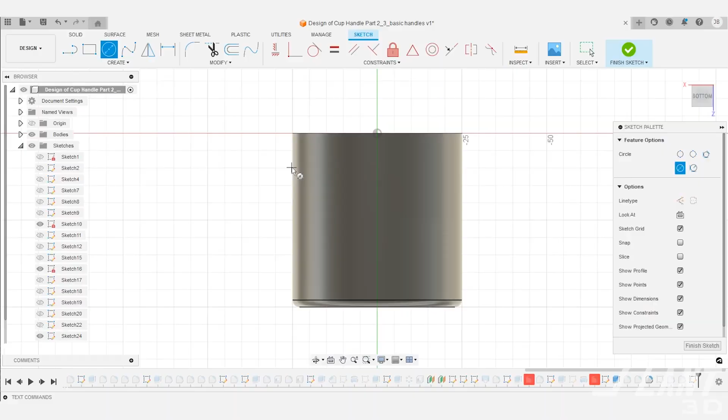If you don't need a feature, do not use it. A lot of products just need an area to kind of catch a finger so that you can pick up something heavy and get a little bit of grip on it. These nubs are a very easy way of doing that. And there's actually the option to invert them so that they are divots and dimples inside the side of the part so that you can have a better grip on it as you are picking it up or grabbing it so that the fingers can catch underneath.

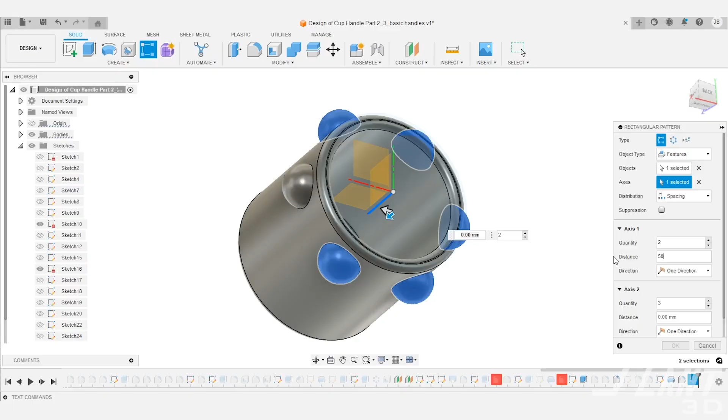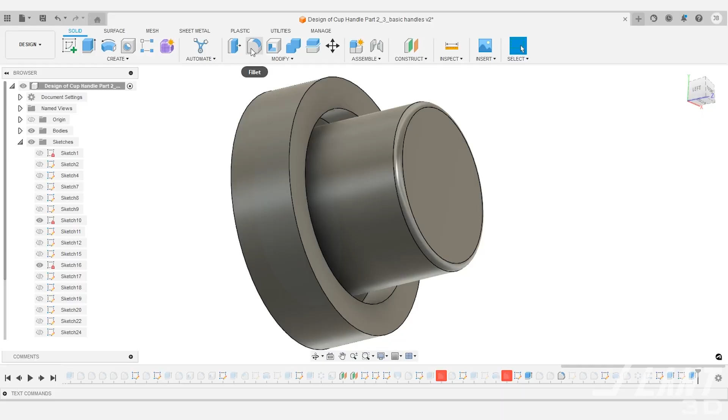This is often done by just a general hemisphere and is a very simple type of handle to use, though it's technically really no handle at all. But if no handle at all is a place to start, if you can get away with it, then let's go to the opposite end and have a handle everywhere. You can actually design handles that wrap around the entire outer circumference of a part. These type of handles allow people to get access to whatever your piece may be from any direction, and they can be very reliable and very strong. They're also very easy to design, especially if you have a circular option like this.

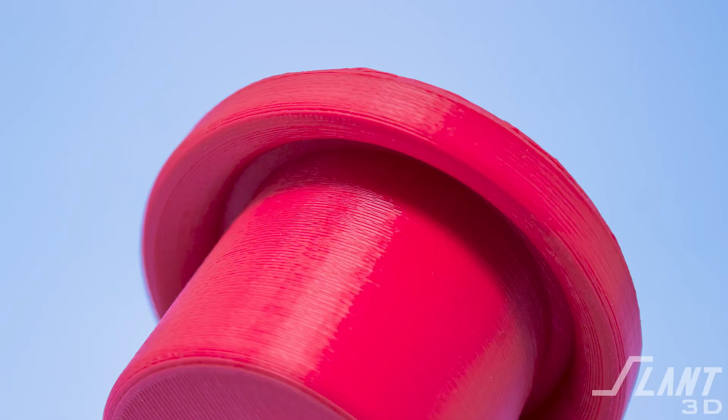But these handles do suffer from the fact that you don't really get a lot of grab on them, but they can work very well for trays or individual containers where you just need to get a lip on them pretty easily and you would like to have a full 360 bit of access to that part. But then let's go ahead and go into regular handles.

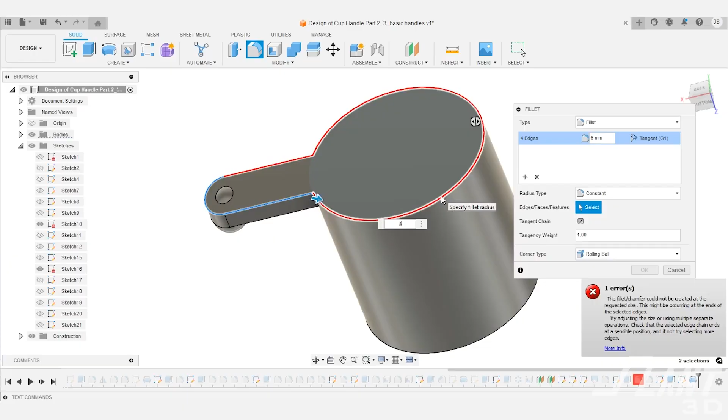The most fundamental type of handle that you can have is actually a rod or a stick coming out the side. But within 3D printing, you have no restriction on the overall design of the handle. It can be thick, it can be wide. There are no restrictions based on the shrinkage of the material. So you can actually take what would normally be a standard dowel or rod sticking out the side and instead expand it and make it wider or thinner, and then even add individual buttons on the bottom so that now you can get a good grip on whatever your object may be, and you can change the handle to the exact width, size, and depth that you actually need so that it is useful to you.

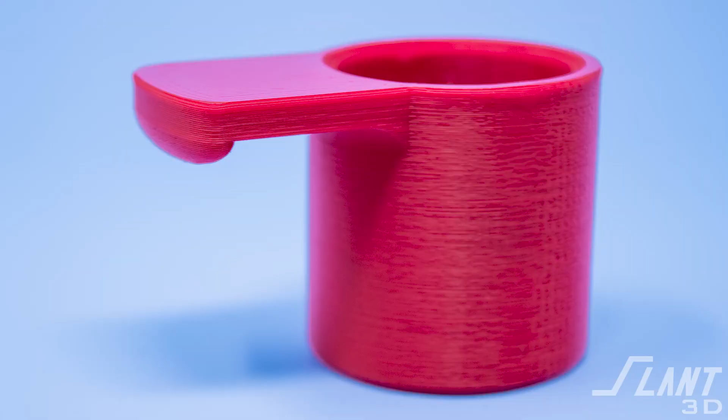So that is a very simple expansion of a very old style of handle, but you have so much more flexibility because again, you can make this exceptionally thick to increase its strength. You can make it wider in this direction so that it kind of wraps around or stretches around the whole object, or it could stretch along the entire edge of a rectangle so that you can have a handle that has good grip and is very simple and easy to use.

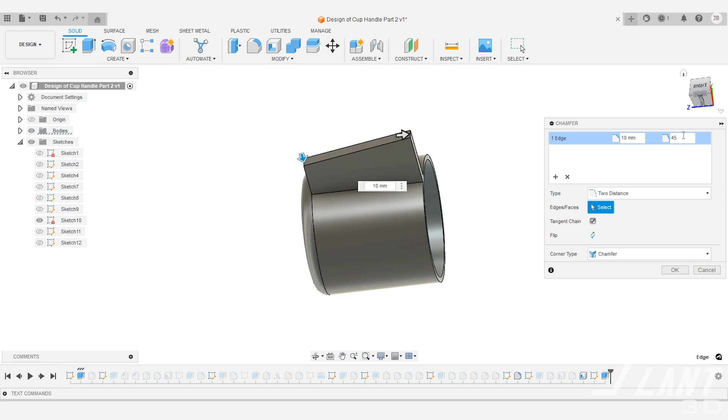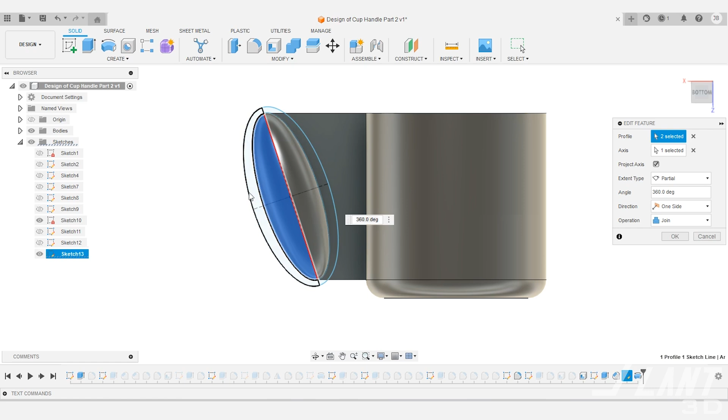But then there are the traditional fin handles, and fin handles are a really good option to use, especially in 3D printing, because each individual layer is continuous. When designing handles for mass production, you want to eliminate as many steps between layers as you can. You don't want to have to move right here, retract, and then move over here. So fin handles like this are a very good option, but you can actually add bulbs to the end of those fins to give a better grip so that you can get ready access to whatever it was. And again, you can make that grip larger and smaller in order to match the container that you're actually using.

This is a very small thing. This could be like a measuring cup of some sort, or you could scale it up to the size of the mug or to the size of a bucket where you would have a couple of these on either side. And they can provide really good grip and really good traction onto the handle while still being very easily mass producible.

These types of handles are not traditionally used with other types of manufacturing because they use a lot of material. If this was molded, then that bulb would shrink and cause deviation and warpage that is not really desirable and creates an inferior product. But you don't have that restriction when using mass production printing. Now, that bulb handle and those fin handles are a really good option because it's a continuous single outline for each layer of the part.

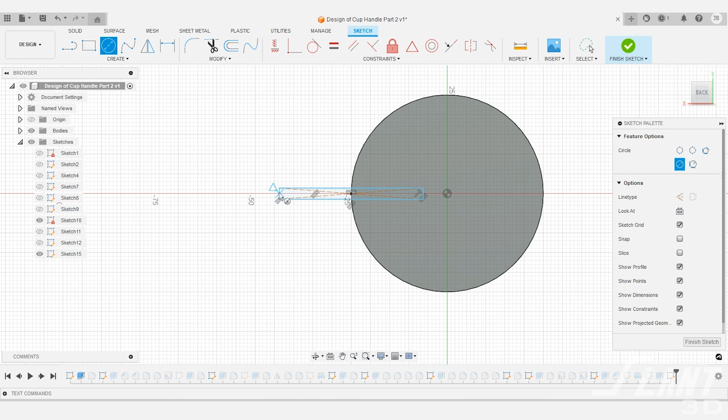And you can take that option and expand it to something like this. We call these eye handles. They're a very simple way to get access to both sides of it. They're generally printed vertically like this. This is the optimum way to do it, where the build plate is right here and growing upwards, but they can be turned sideways in order to create kind of a handle like this, but it's not the greatest. It's best if they're done like this.

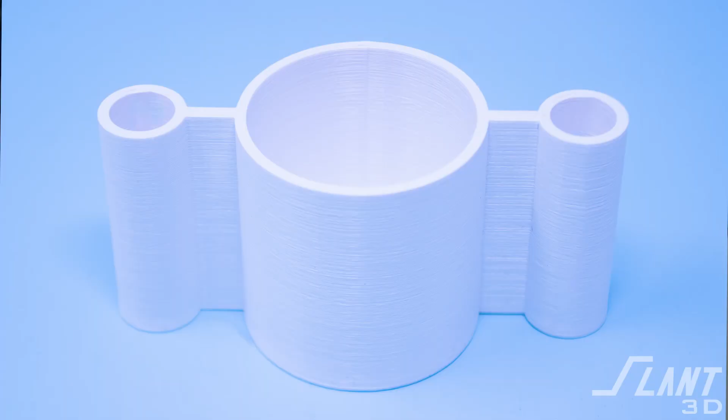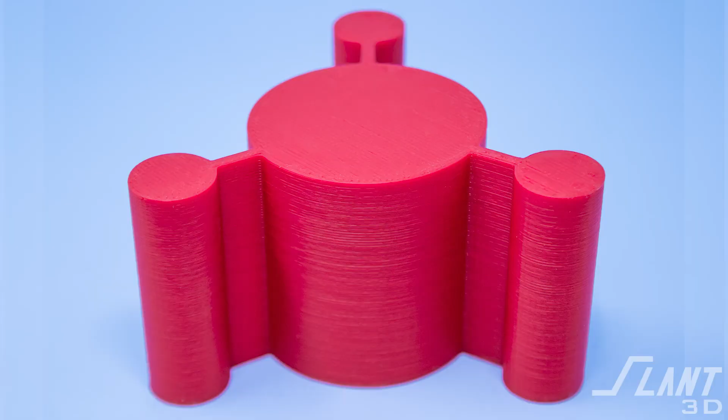This gives you easy access to both sides and a very nice, simple member that can be grabbed very easily from either direction. And since it's symmetrical, you have no restrictions on what sides can be grabbed from it. These are a very simple handle and are really easy to scatter around the outer side because you can increase their multiples so that you have key grabbing points throughout the outside of the part. And since they are really distinct from the core of the part, they immediately call out where should be grabbed. And that's an easy way to do it.

But this handle is a little bit unhandy because you would have to make those circles very large if you wanted to get a really deep grip on it. So they can be expanded so that you have more range on it. And right here, you can actually grab around like this and get a really good grip on it. And if you want to make them handy for right and left-handed, you can flip them around to the other side so that you can grab right there, or grab both to get a really good grip on whatever your object may be. Though this brings up a good point between right-handedness and left-handedness.

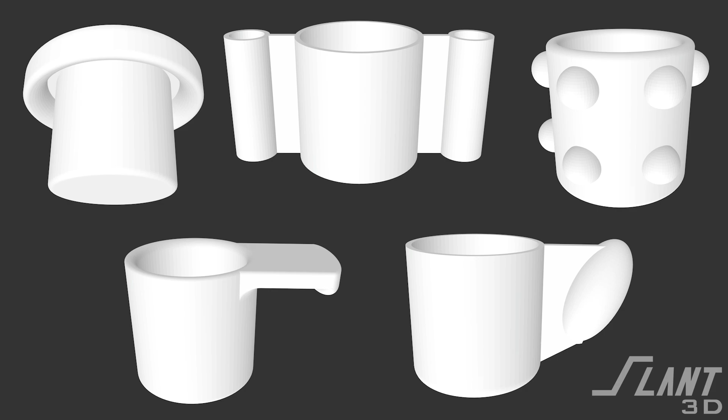So those are the most basic handles. But since we are working with 3D printing, we're able to create very complex shapes that were never possible before, because with pottery, you don't make really thick objects, because as you bake it, if there's an air pocket, it will expand and cause the pottery to break. And the same applies for molding or traditional types of forming, where really thick materials would cause deformations of some type, because molding materials would cause shrinkage. That's why you can't have these type of bulb features. But again, that's not relevant for printing. You can create any type of feature that you want within reason, so long as it's still manufacturable.

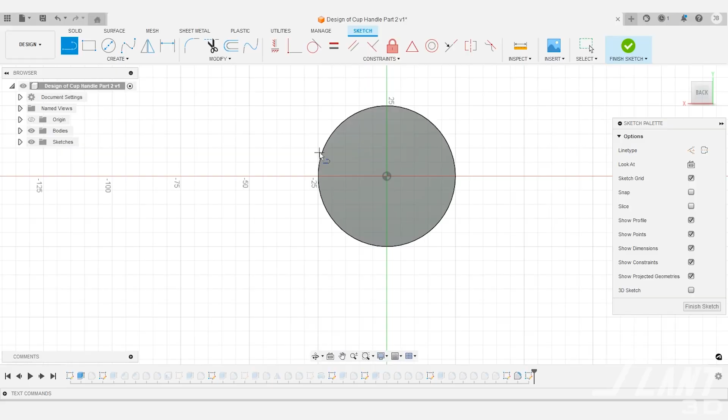This is one of the simplest versions of these. So this is a very simple example of just a hook handle. Now we've shown this S handle before in a previous video, but this is a way of expanding it so that it is more ergonomic. So basically it is a mirror of the fingers themselves so that they can fit right into it while still giving distance from the object and still being comfortable. But this has a problem of not really grabbing onto my fingers really well. I can't really grip it.

It's more of a fingertip type of a handle. Still useful because you can get a hold of something like this, which might be useful if you have a high strength need, maybe like carrying shopping bags or some kind of widget or tool where you want to get a grip on it like this.

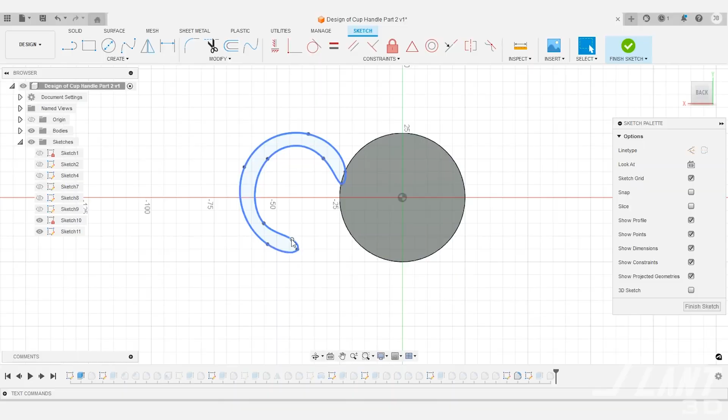But if you want to hold it like this, a better way to do it would be to add that very thick feature so that a person can really get a hold of it really well with the full wrap of the fingers and not just the fingertips, which is the issue right here. So that extra thickness, which is not possible with really any other sort of technology, is very possible and is very mass producible with 3D printing, because again, it's a continuous outline, but it's very strong and rugged and creates a nice ergonomic grab right there.

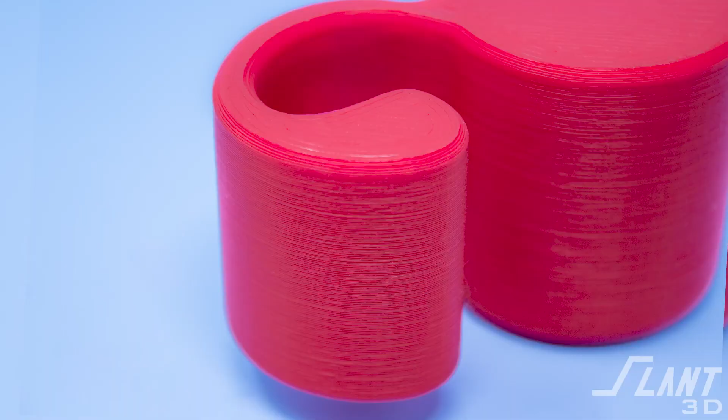And then you can change this curve and this overall layout so that it works for your particular application. But again, those are the basic ones. If you want to go full advanced, you can do a full parametric handle, which is the two variations in sizes right here. Again, this one is optimized to right and left-handed. You can expand it so that it can use both, or again, mirror it across much like this one in order to create an ambidextrous type of object.

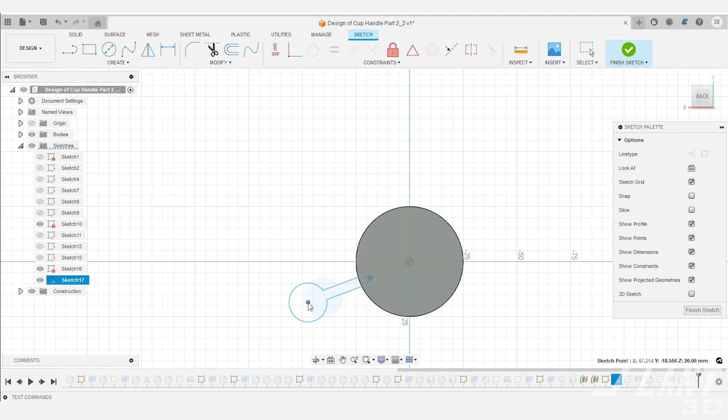But ultimately, a handle can be grabbed from both sides, and handles very often are restricted to one side or the other. A handle on the right side can only really be grabbed with the right hand, and so on and so forth. So decide what is useful for your product.

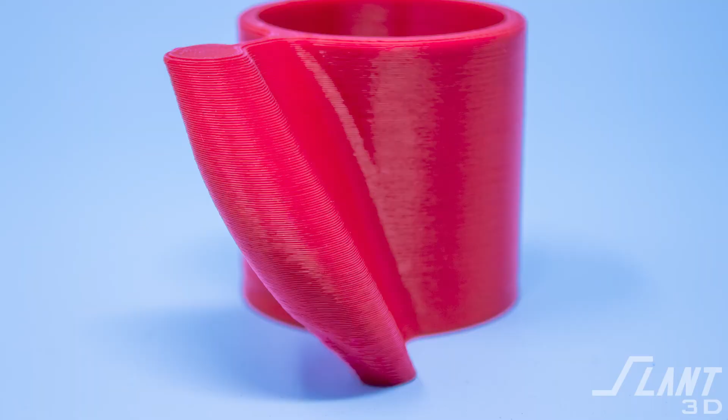But these parametric handles are able to change shapes, so they start narrow and then go wider and then go narrow again. And this is a really nice handle because it is perfectly molded to the grip of your hand, to where the thumb lays right there and then the rest of the hand has a thick object to hold on to, as if you were grabbing almost the joystick or the side of a game controller. And you could actually modify this so that it does emulate the design of a game controller. So we'll just call it a controller handle.

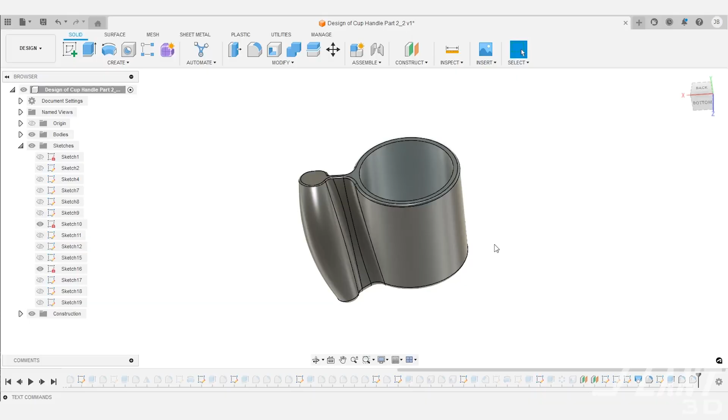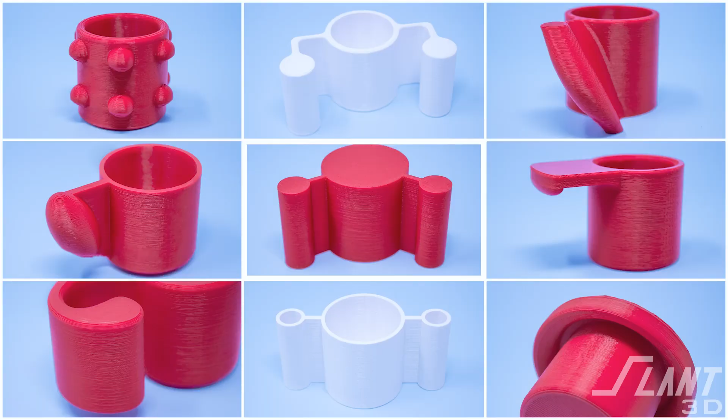So there are just a few new handles for you. Hopefully you can use them inside of your projects for whatever you might actually need a handle for.